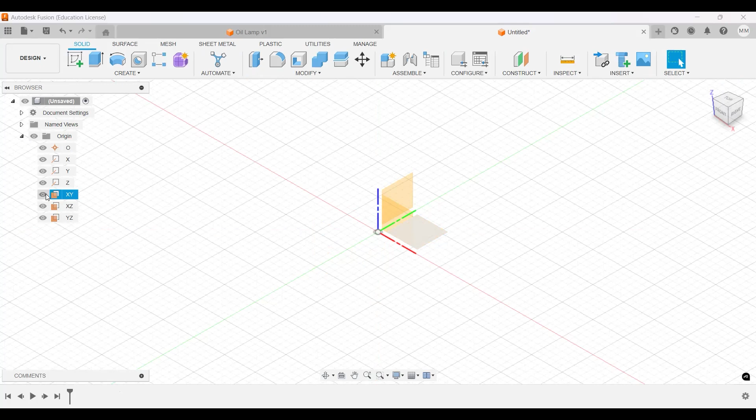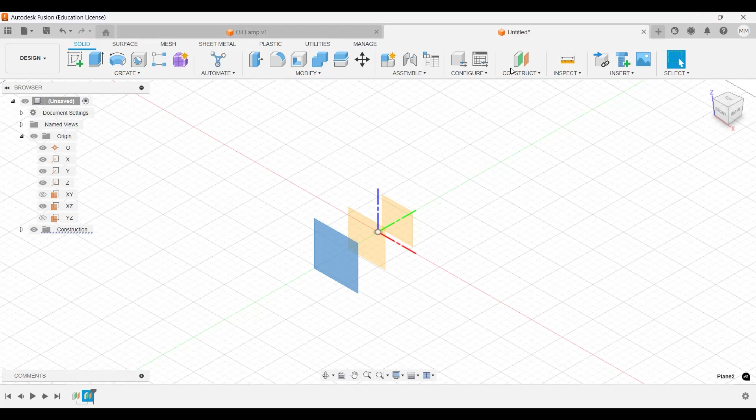So click here in the offset plane, and we can type it here. We're gonna go into this direction, so we're gonna go -25. Press enter. We're going to repeat that 2 more times. So out of the front one, we're going to go -25. Press enter. And out of this one, once again, the front, we're going to go another -25 and press enter. So this is going to look like that. We're going to make another one after that one, but let's stick with this one first.

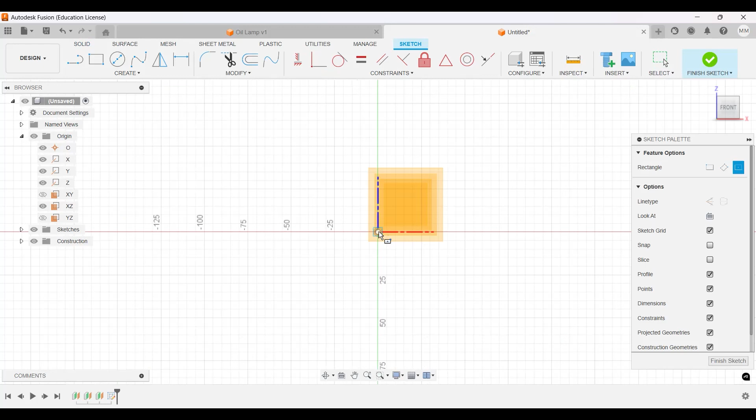So choosing by clicking this front plane, right? This is the front plane, the XZ. Make sure you have that one selected. We're going to go to create sketch. And then we're going to go to create, look for rectangle, and select center rectangle. Once with that one, let's go to the center. Let's open it up. All right, and we're gonna dimension this to be 60 by 60. This is gonna be a square technically. All right, and that's it.

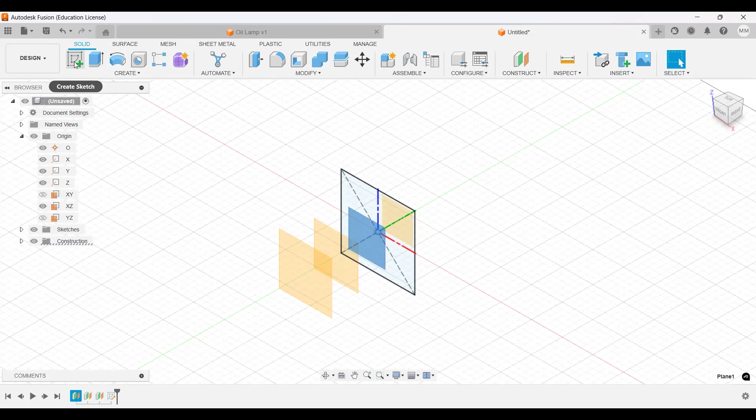Finish sketch. Now selecting the first reference plane that we made, you're gonna go to sketch, and this time we're gonna be drawing a circle. So we're gonna select a circle, go from the center as well. Doesn't matter the size right now, I'm just making a circle, which we are going to be dimensioning. And this circle will be 50. So 50. There we go.

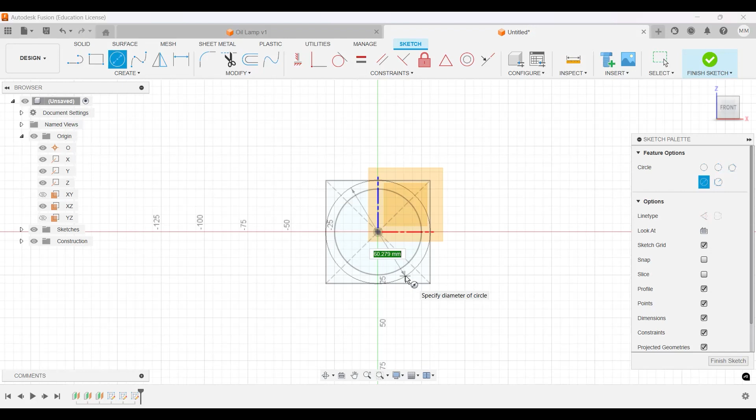Now on this second plane, we're gonna go to a different sketch. We're gonna be making another circle, also from the center, almost right there touching the edges. So about there, this circle will be, I think, 86 if I'm not mistaken. There we go. Yeah, it was on the outside, so it will be 86.

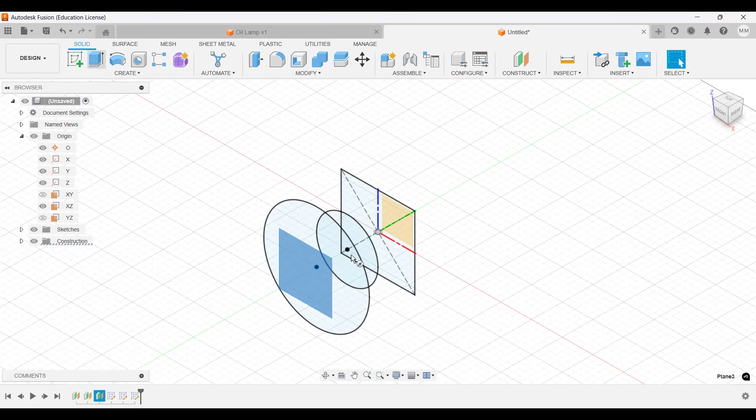Finish sketch, and then on the last front plane, we're gonna make another sketch, also another circle from the center, and we'll also be dimensioning to 86. So finish sketch. So you can see we have all of these faces. So we have the figures, all of these shapes in different planes.

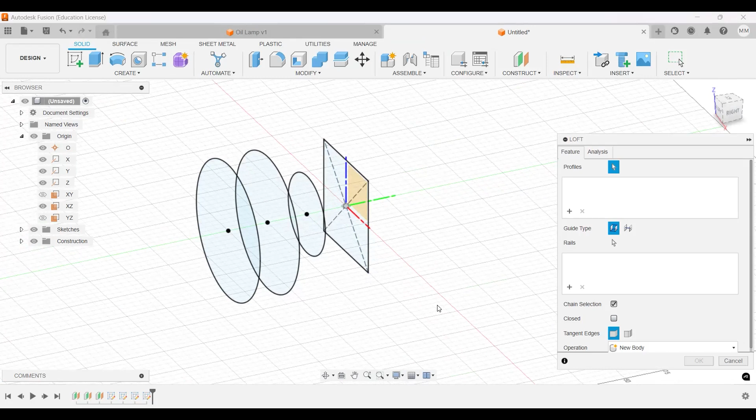So all we're gonna do is use the Loft feature. So we're gonna go to create, look for Loft, and we're gonna start. You can see we have profiles and then some rails and some things. We'll do it in a little bit. So just click this front shape, the next one, and notice how it makes an extrude, a 3D model. So let's click the next circle, and notice how it's bending, right? Because it's basically combining all of the shapes.

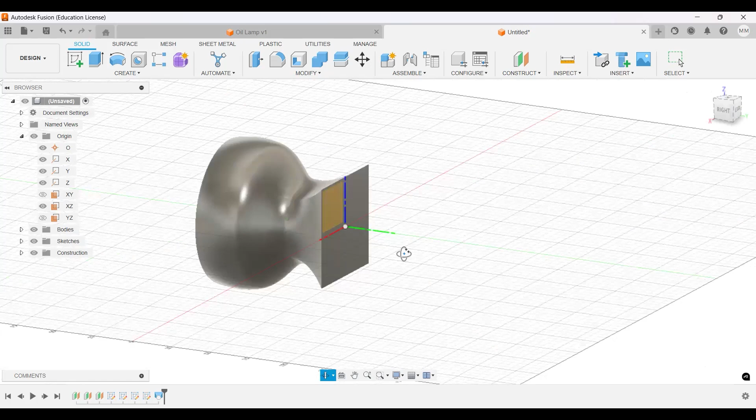And then let's click on the square, and look how we made that shape, right? It makes like the head of the hammer. So you just press OK, and that's the front part of the hammer. So now we still need to do a couple more things.

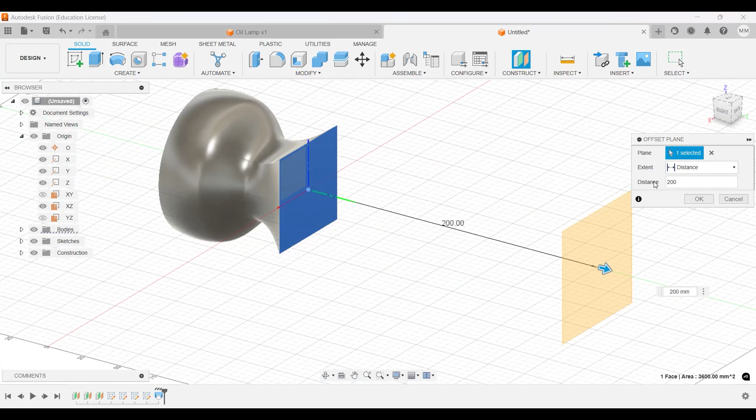So from this plane, we're gonna do another offset plane, and this time we're gonna go back, and this time we're gonna type it. This will be, I believe, 200 millimeters. So it will be 200. Let's press OK. And in that plane, we're gonna be making another drawing. So let's make another sketch in that face.

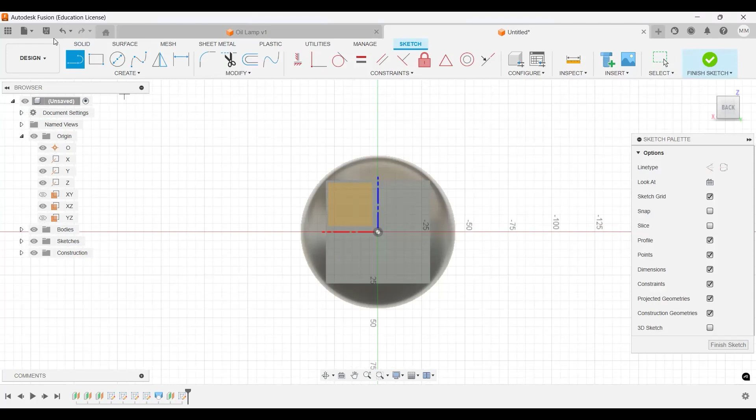We're gonna start with a line to make this easier. So just select line, make sure I zoom in. I go here towards the center. Yeah, it looks blue, so it's center. And I wanna make this a reference line, so now it's my construction line.

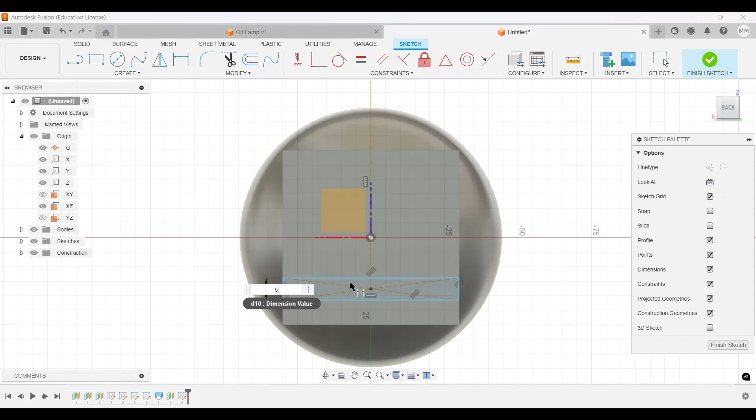And using the bottom of that line, I'm going to make another rectangle, center rectangle from this bottom point, something like this. And the dimension for this will be 5 millimeters by, from this point to this point, 75. So from the center, so technically it will be 150 out of it.

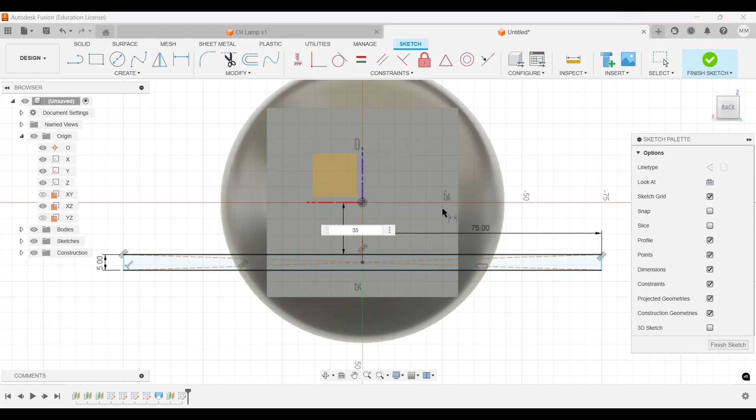And I want, so it will be something like this. So yeah, it's a little bit lower, so that's fine. Let's get that back face. And I'll make another dimension from this to this point, let's say this will be about 35. Let's see. If not, we can always change that.

All right, so we have that. We can always change to the isometric view. And yeah, it looks something like that because I want to make my curvature. I think I might have made mine a little bit different, but you can always change that length. So all right, let's make another sketch.

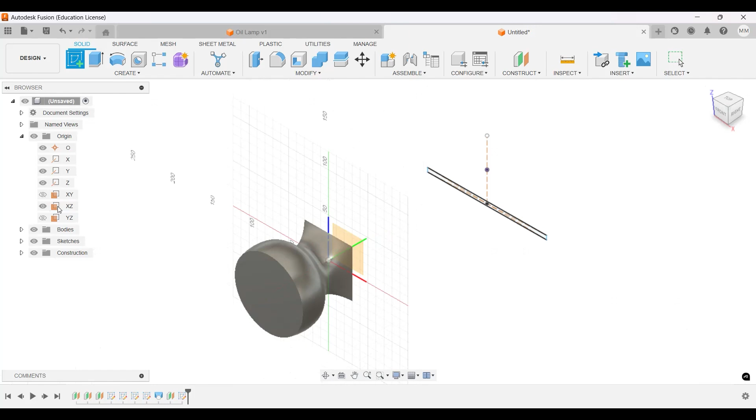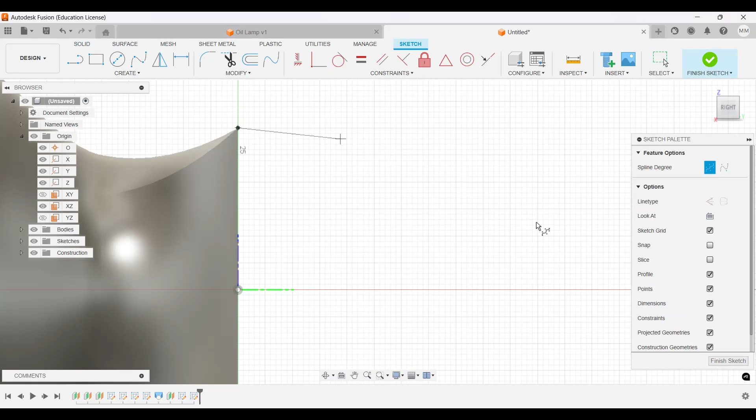This time, oh, I guess before we do that, let's select this. Which plane is it? It's the YZ. Select the YZ plane. Now you can see it from the side. And we're gonna go to create and select spline and control point spline. So I'm gonna get as close as I can to the edge of this part here. Get as close as possible. One there we go. And one here, so make those three.

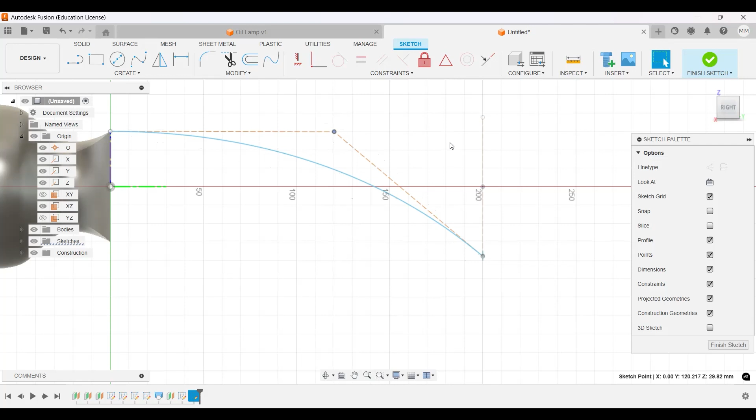And just press OK. And then using this, you can drag it out so you can make the curvature of the hammer here. So something like that is good. It's just in SolidWorks you'll be able to do this, but here you'll use that in a little bit. You'll see why. You see our curvature, finish sketch.

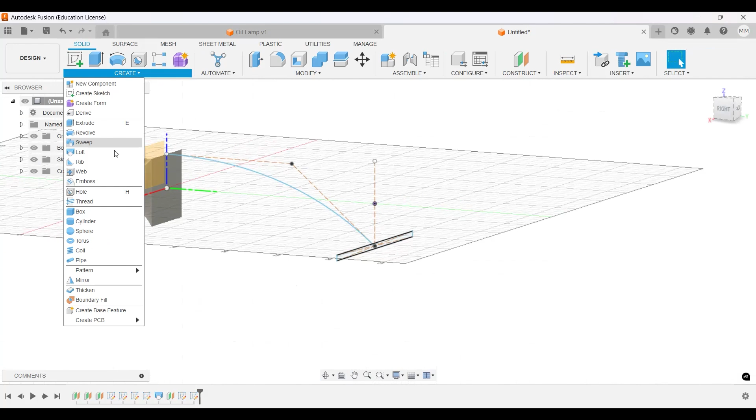And now you can close this and let's go once again to Loft. So this time the profile, let's just delete that one. So profile, we're gonna be using the back of this face, touching this rectangle, and you can see how it goes straight, right? But we want this hammer to be curved.

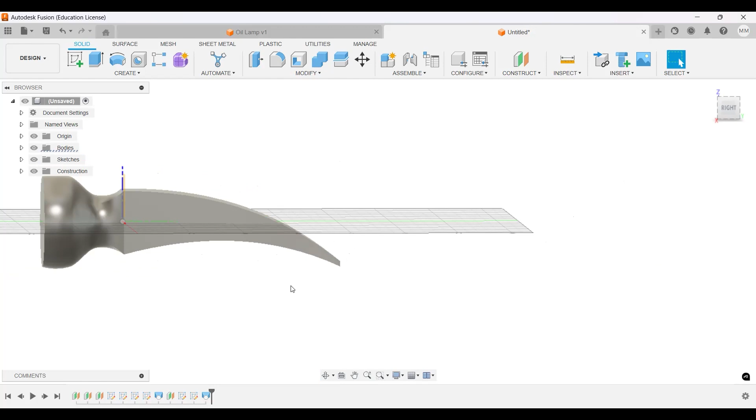So you can go over here to the center line. We're gonna click the line that we made, and look, it makes the bend for us. So we click center line, we click the line, okay. And now we can just hide the origin, and we made the head of our hammer. Now all we need to do is just do the cut. It's pretty straightforward. But this is how the hammer should look. You guys can already save this progress so it doesn't erase. But now I'm gonna do the head, so the cut, so this will vary.

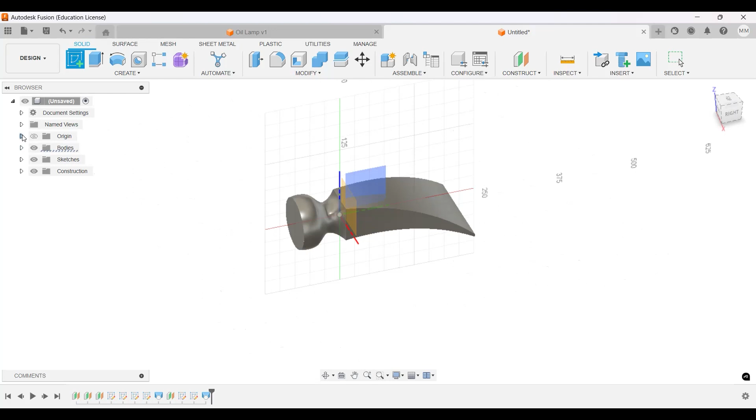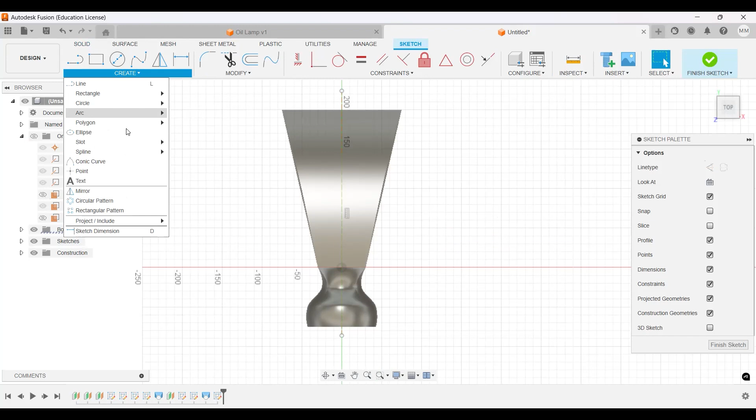So I'm gonna select sketch. I'm going to select, I guess, the XY plane, right, top plane. And I'm going to be making, once again, a line from the center all the way back, which is going to be our reference line. So normal construction. And then from here, I'm going to create another center. There are different ways to do this, but this is the way that I find the easiest. So making the center rectangle.

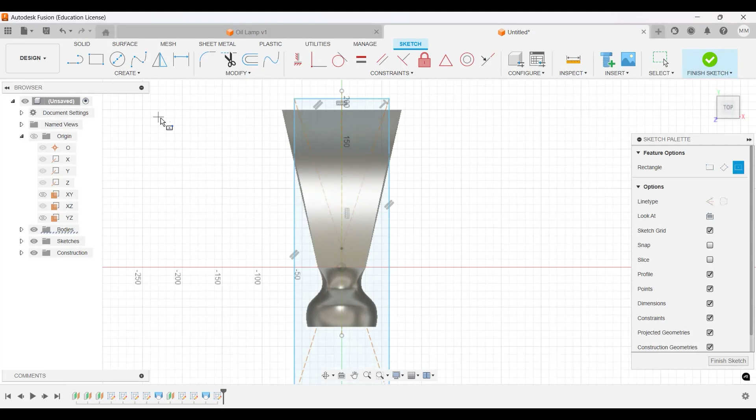We're making about a line over here, not towards the front, and just a rectangle like that. I think it might vary from the ones that I have in the pictures. So with this, we can dimension this, right? I need to see the ones that I have in my picture. Okay, so I saw the ones that I have.

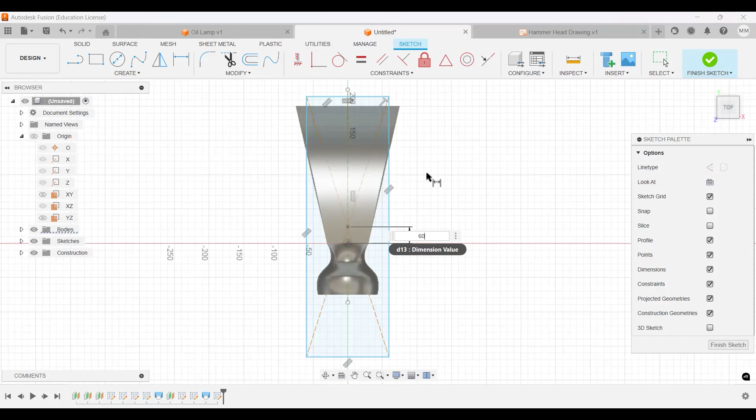So I think I made from this center to this point to be 60. Going back, I made from this center to this line to be 30. And then from here to here, I think I made this one to be 140. There we go. Yeah, so like that. And then I'm gonna make just a couple lines. So from here to the center, then from here to here, that triangle, I think it looks nice.

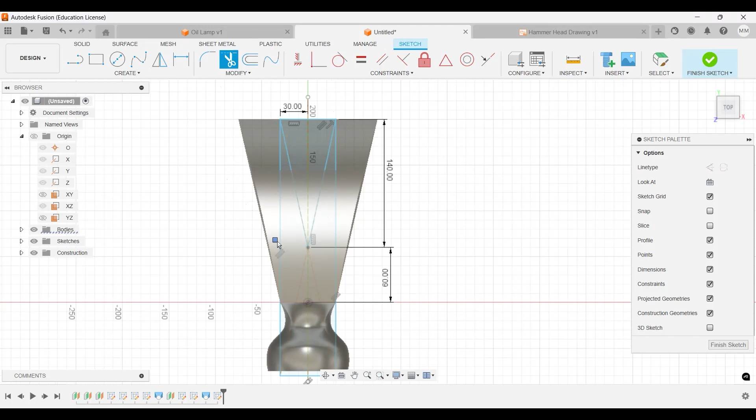Then I'm gonna use the trim to basically cut all the other things. All right, so we're left with that triangle. I think it looks good. I don't think it looks crooked unless I made it crooked. It's maybe just a perspective, but I think it's good. It's going through the center. So anyways, I think that's good.

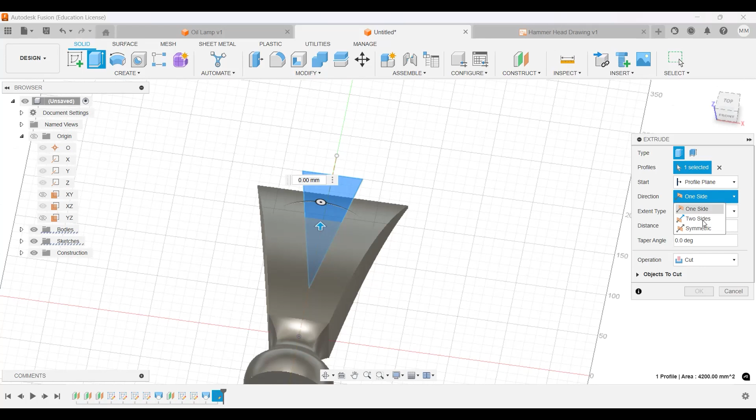I'm gonna go here, click on extrude. I'm gonna select cut, and instead of one side, I want to do two sides. We can always do symmetric, symmetric is essentially the same. And I'm just gonna drag it. It's cutting through both sides, and it doesn't matter how much. Just gonna make a cut and press OK. And I have the head of my hammer.

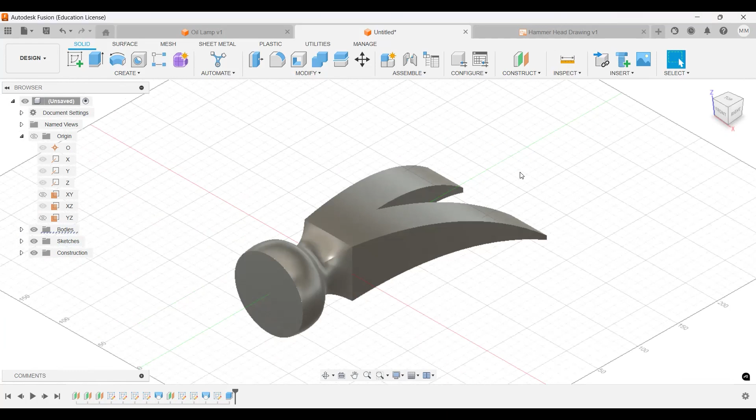So this is how yours is going to look. Your dimensions might vary slightly depending on how you make your center, but this is my hammer. So this is how I made it. I'm gonna save this and make the drawing out of this one.